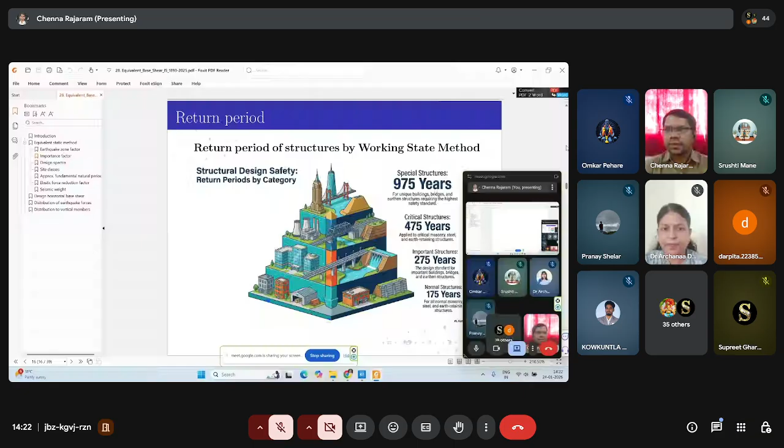So is my screen visible? Yes sir. Thank you Dr. Archana ji and Vidyavan College of Engineering and Technology, Mumbai. So today, without any delay, I'm going to give the lecture on determination of seismic base shear by equivalent static method as per IS 1893:2025.

The contents of today's presentation are: introduction, equivalent static method, earthquake zone factors, importance factor, design spectra, site classes, approximate fundamental natural period, elastic force reduction factors, and seismic weight calculations for calculating design base shear using the equivalent static method. Also design horizontal base shear, how it gets distributed onto the floors, and how to calculate design base shear in the vertical direction and its distribution into the vertical members. These are the contents to be delivered in today's presentation.

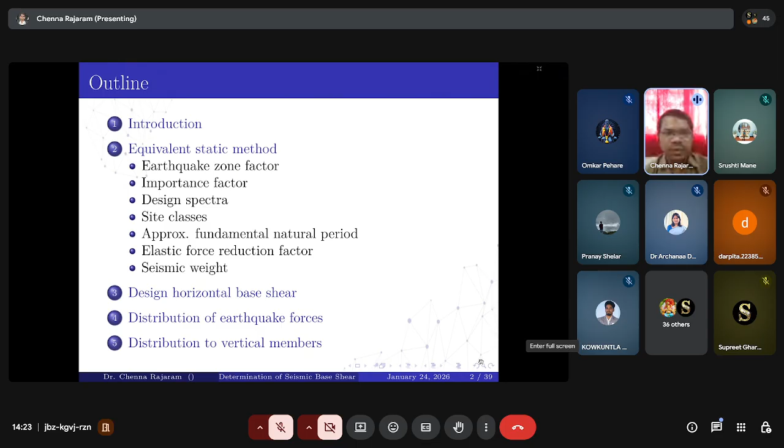Coming to the introduction, before discussing the equivalent static method, we should first discuss the earthquake design philosophy of IS 1893. As per IS 1893, the design philosophy is that for minor shaking, the main members should not get damaged, like beam elements and column elements.

The building parts that do not carry load may sustain repairable damage. For moderate shaking, the main members may sustain repairable damage, and under strong shaking, main members may sustain severe damage but should not collapse. So the main objective and motto of the design philosophy of IS 1893 is that the building should not collapse, even though severe cracks or severe damage may take place.

It is a fundamental safety concept. Safety is very important in earthquake design philosophy, which governs how a structure is expected to behave under loads.

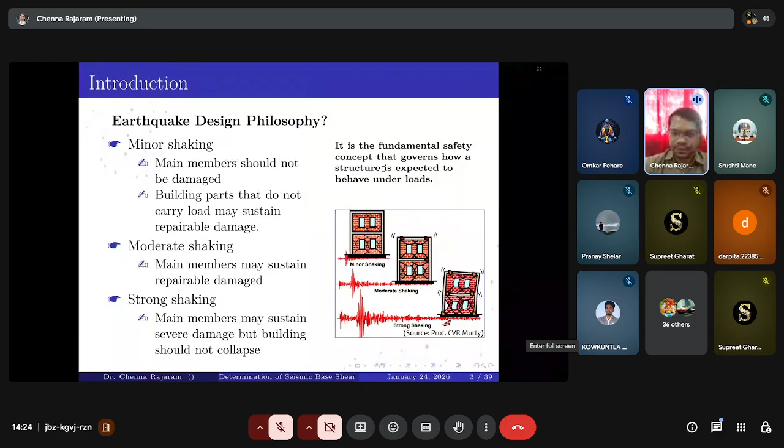Generally there is a contradiction between earthquake resistant and earthquake proof. What is the difference between these two? When we talk about earthquake resistant, the main objective is life safety. It prevents catastrophic collapse and allows people to evacuate safely. This is what earthquake resistant design is.

Earthquake proof means the main objective or goal is zero damage, which is not possible. During any kind of shaking, whether minor, moderate, or severe, there should be some kind of damage that takes place in the building itself. That's why zero damage is not possible in a building during the shaking of the ground.

So this is earthquake proof design, not earthquake resistant design, and it aims to withstand any earthquake without any structural harm. The design philosophy is 'it bends, don't break.' In earthquake proof, the main philosophy is it eliminates all seismic effects.

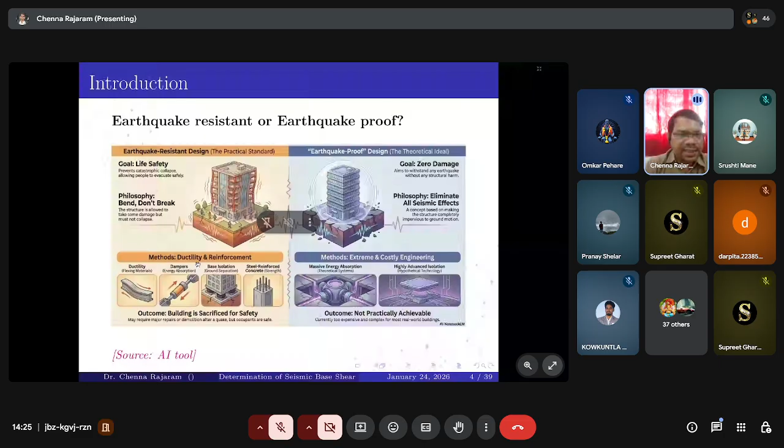What are the methods for earthquake resistant design so that damage can be reduced? The methods are: provide ductility in the structure in terms of reinforcement as per IS 13920; dampers, even various types like passive dampers, active dampers, liquid dampers - these absorb energy; base isolation, which is also one of the techniques to reduce structural damage; and steel reinforcement concrete, which provides the strength of the structure.

Coming to earthquake proof, it is very difficult providing massive energy absorption. As you know, a huge amount of energy comes during earthquakes, so absorbing that kind of energy is very difficult. Providing this massive energy absorption is highly difficult, along with highly advanced isolation. So structures which are constructed should be earthquake resistant structures, not earthquake proof structures.

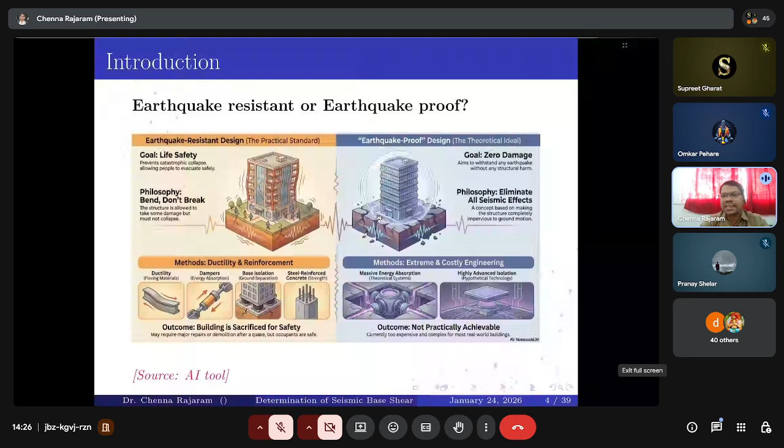What are the various methods in earthquake analysis? The method of analysis shall be linear for the earthquake resistant design of structures, which can be performed by the following methods. The first one is static analysis by the equivalent static method. Basically there are two types of methods: one is static analysis, the other is dynamic analysis. For static analysis, the method we follow is the equivalent static method.

There are two methods: one is the response spectrum method, the other is the response history method. Previously, this response history method was termed the time history method. The response history method is basically a dynamic analysis method.

Now the next question is, when do we go for the linear equivalent static method? And what is the linear equivalent static method? It is a method of linear analysis of a structure to estimate the dynamic earthquake response, considering the fundamental lateral mode of oscillation, using the pseudospectral acceleration response spectrum of the design earthquake hazard.

Now, what are the terminologies in the definition of the linear equivalent static method? We'll discuss them one by one.

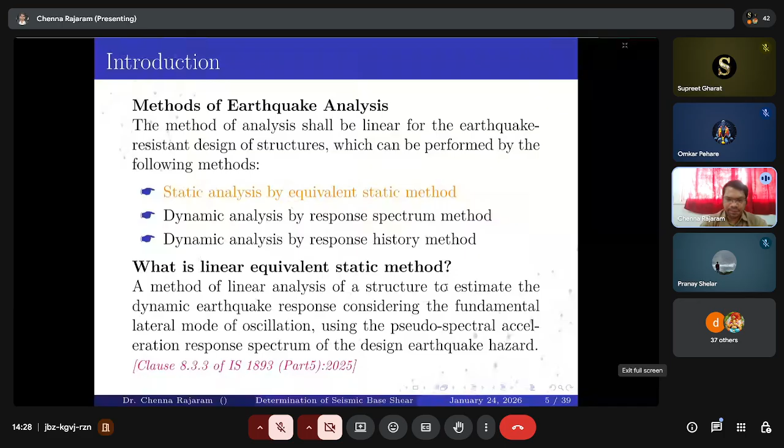Now, when do we apply this equivalent static method? As per IS 1893-2025, it is generally applicable when there is more than 80% of the mode participation in the translatory direction for the fundamental natural period. Only then is this equivalent static method applicable; if not, then we will not go for the equivalent static method.

In the previous code, that is IS 1893-2016, there are guidelines based on the height of the building and based on the zone. It is classified that we have to go for equivalent static analysis under these kinds of considerations.

Consideration is completely different. Coming to the earthquake zones, we'll discuss the earthquake zone part and building categories and building configurations. Building categories basically divide into special structures, normal structures, and important structures. We'll discuss each one of them.

For building configurations, whether the structure is regular or irregular, we have to go with the equivalent static method as per the current code, and the response spectrum method, which is a dynamic analysis. Irrespective of the zone or building category, we have to perform the response spectrum method. It is recommended for irregular buildings.

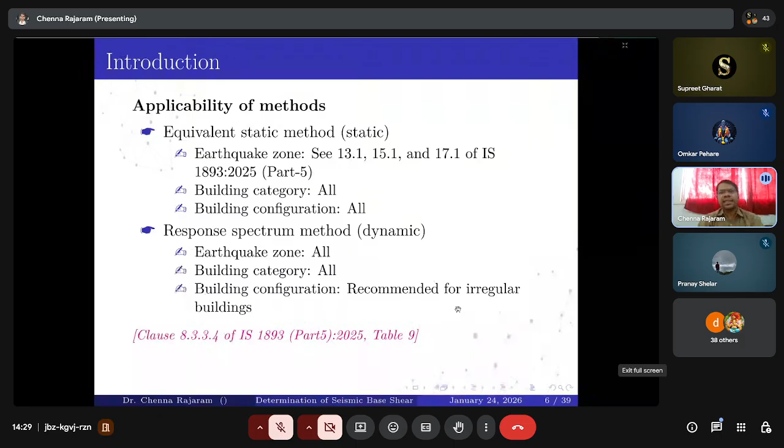There is another method called the response history method, which is a time history method. It is applicable for all zones and building categories, recommended for critical and special buildings, except for critical and special small buildings. Now what is the definition of a small building? The definition is given here.

For a single story structure, if the built up area is less than 50 square meters, with load bearing walls oriented along both principal plane directions to minimize torsional irregularity, structural plan density not less than 15%, and laterally supported wall lengths not more than 3 meters, it is termed a small building according to the latest IS 1893 code. Building configurations are recommended for all irregular buildings.

In the earlier version of IS 1893, we used maybe one or two ground motions to obtain the response of the structure, without knowing the characteristics of the ground motion itself. Now, as per the response history method in the latest code, we have to perform 30 ground motions. We cannot perform only 29 or 28 ground motions, there is no relaxation in that. Those doing the response history method have to perform 30 ground motion records itself.

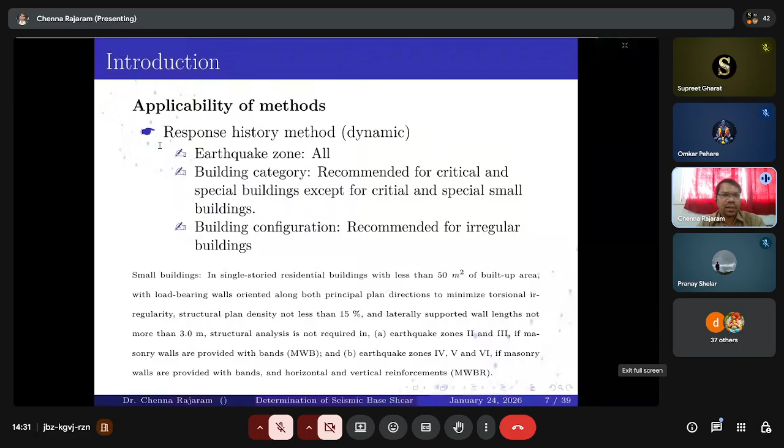What is the equivalent static method procedure? What are the various steps involved? A pictorial representation is given for the equivalent static method. The first step is: when do we use this method? It is clearly given for structures where the first translational mode of oscillation governs the primary earthquake response. The governing parameter is the mode shape, that is, 80% of the mass participation is in the first mode. Then we go for the equivalent static method.

The second step is to prepare the analytical model, using any kind of software, and apply gravity loads such as dead loads, live loads, and other loads onto the structure. Then perform and apply the earthquake load, that is, the lateral load.

Then comes the combination of loads. As per IS 1893, the load combinations are given, like 1.2 times dead load plus 1.2 times live load plus earthquake load in x direction, y direction, and so on. There are various cases given in IS 1893, and we have to perform all the load cases on the structure. Then extract the structural response after applying the load combinations, and then we go for the design of the structure.

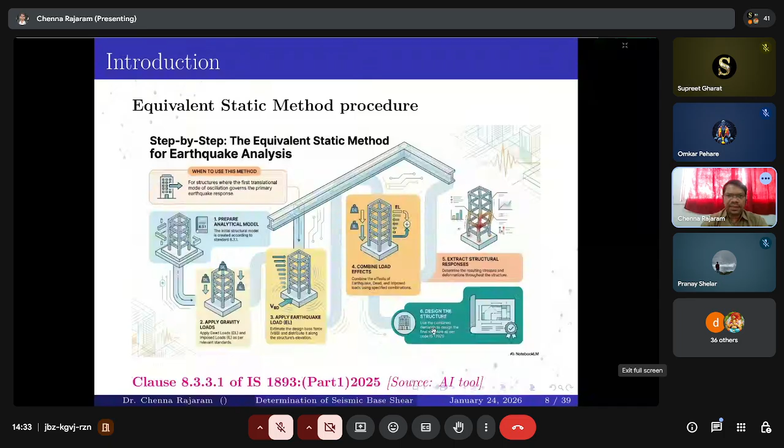The next topic is the revision of the codes. The Indian Standard IS 1893 was initially published in 1962, titled 'Recommendations for Earthquake Resistant Design of Structures.' The first revision took place in 1966, followed by 1970, 1975, 1984, then 2002, 2016, and 2025. From 1984 onward, there is a large gap between revisions, from the fourth to the fifth, sixth, and seventh revisions.

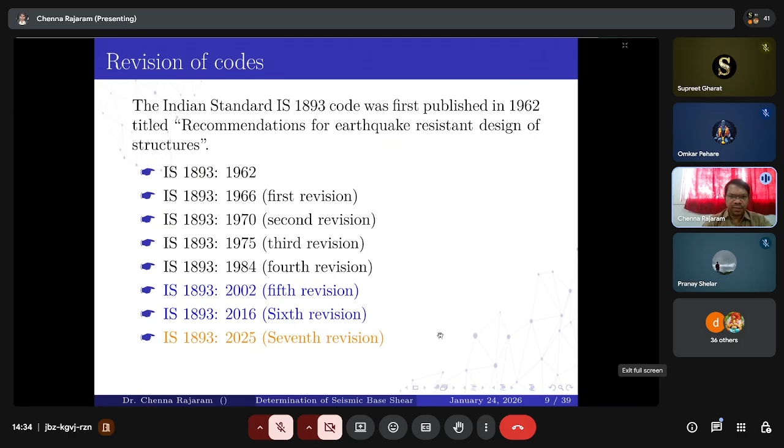We'll see the various categories in IS 1893 2016 and 2025. In 2016 there are five parts. Part 1 relates to general provisions of the building and hazard, part 2 relates to liquid retaining structures like liquid storage tanks, part 3 is for bridges and retaining walls, part 4 is for industrial structures, and part 5 is for base isolation buildings.

In 2025, more parts are coming covering various kinds of structures. Part 1 is general provisions similar to 2016, part 2 is for liquid retaining structures, part 3 is for bridges, part 4 for industrial structures, part 5 for buildings, part 6 for base isolation, part 7 for long distance pipelines, part 8 for steel towers, part 9 for coastal structures, part 10 for tunnels, and part 11 for earthen embankments. Out of these 11 parts, a few are already released, and a few more are under review.

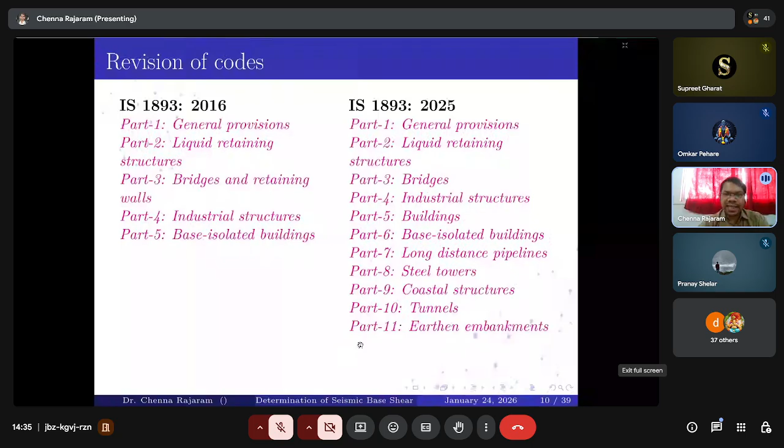Now, what is the equation used for calculating the equivalent static method? There is an earthquake horizontal force, VBDH, at the base of the structure, and an earthquake vertical force, VBDV, at the base of the structure, considering the pseudo-spectral acceleration spectrum shall be estimated as follows. This is the equation.

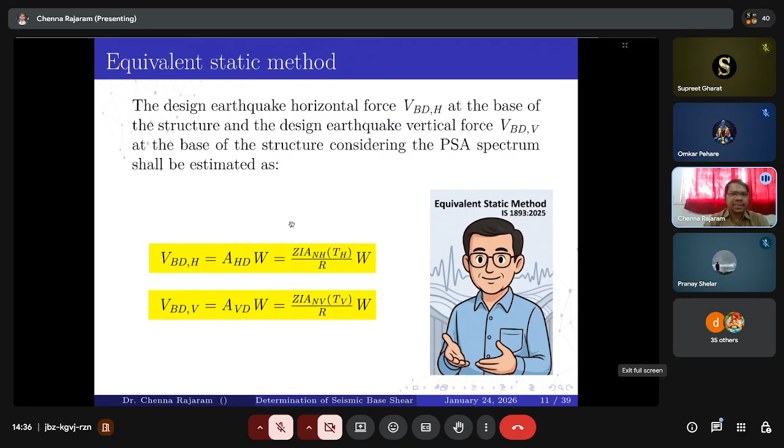In the 2016 code, we use the equation Z by 2, I by R, and SA by G for calculating the AH value, that is the horizontal seismic coefficient. But here there is no term called 2—why, we will discuss in subsequent slides. So VBDH equals AHD into W, where W is the seismic weight and AHD is the horizontal design seismic coefficient. Similarly for the vertical direction.

Now coming to the earthquake zone factor: the value of peak ground acceleration divided by acceleration due to gravity, SA by G, is considered for estimating the effects of design earthquake shaking on the structure, corresponding to the return period and the earthquake zone in which the structure is located. In the previous code, there were only four zone factors, for zone 2, zone 3, zone 4, and zone 5.

The factors are 0.1, 0.16, 0.24, and 0.36. So the maximum peak ground acceleration for zone 5 is 0.36.

But here, the return period—a very important parameter—came in IS 1893 of 2025. These return periods are given as 75 up to 9,975. How we calculate these return periods, I will give an example in the subsequent slides.

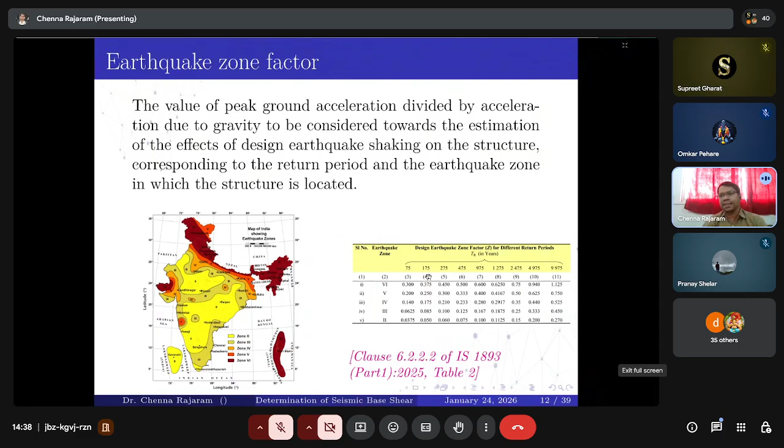The buildings are categorized differently in the earlier code—not based on functional utility, but given as an importance factor. For normal buildings, the importance factor is 1; for hospitals and similar structures it is 1.2; and for special structures it is 1.5. But here, the buildings themselves are classified. I'll show how it is classified.

We'll see what is the return period, with a simple calculation given here. So what is return period? The return period or recurrence interval of an earthquake is the estimated average time between events of a specific intensity or magnitude occurring at a given location.

So what is the return period of an earthquake that has a 2% probability of exceeding in 50 years, assuming the design life of the structure is 50 years? We use the equation Pn equals 1 minus (1 minus 1 by t) whole to the power of n, where n is the design life of the building, that is 50 years, and the probability is 0.02.

By simplifying this equation to solve for t, it is approximately equal to 2475 years.

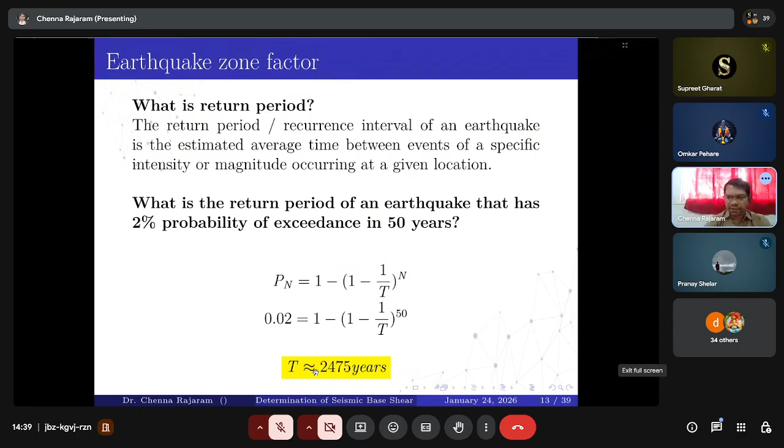So coming to the return periods, based on the return periods, these return periods are assigned to the structures. Earlier the concept of return period was not there, but whatever spectrum we see in the earlier code, that is for 2,475 years return period, for 2% probability of the structure. Now here the return periods are assigned to the structure.

So normal structures, important structures, critical structures, and special structures - these are the categories given in the current code. Normal structure means all normal masonry, steel, and earth retaining structures. Important structures means the design standards for important buildings, bridges, and earthen structures. Critical structures means applied to critical masonry, steel, and earth retaining structures. Special structures means bridges and earthen structures requiring the highest safety standards.

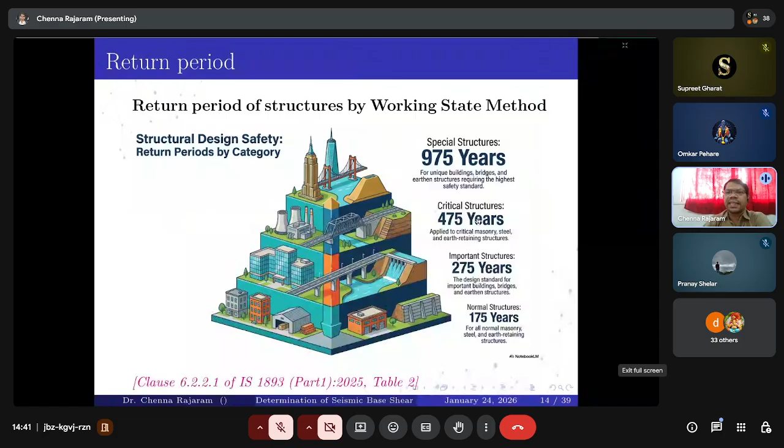There is a tabular column given in 1893 showing what types of buildings come under each category of structure, from normal to special structures.

This is for working stress method. There is one more concept called working stress method and limit state method, which is based on performance based design. The current version of the 1893 code is based on performance based design, that's why these two methods are provided. In the draft code, if you observe 1893, there are two terms called strength criteria and serviceability criteria, similarly here the terms are replaced with performance based design.

If you see the limit state method, for normal structure the return period is 475 years, whereas in working stress method the return period is 175 years for normal structures. Similarly for special structures, the return period is 4,975 years, but for working stress method the return period for special structure is...

Sorry to interrupt, we are not able to see your slides. Unable to see, huh? It was there just 1 minute before, it got cut. Is it okay now? No, we are still not able to see. I think screen sharing stopped. Screen share, 1 second. Yeah, now is it visible? Yes, sir, yes it's visible right now. Yes, fine, thank you.

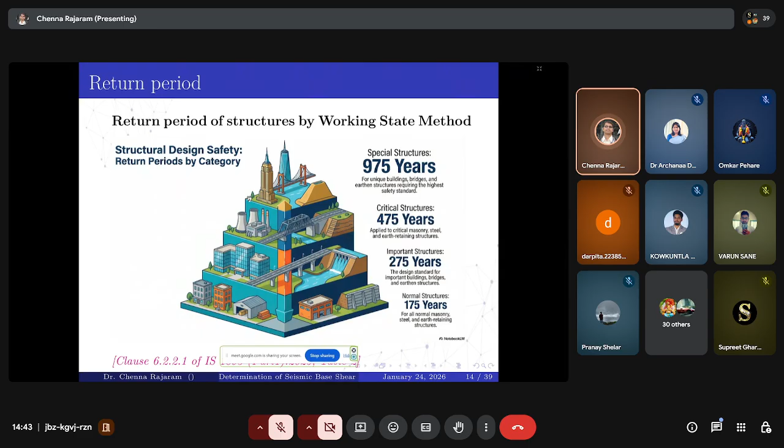So now if you observe the return period for limit state design, the maximum return period is 4,975 for special structures, and 975 years for special structures in working stress method.

Then the next parameter is the importance factor. The importance factor used in the estimation of the design acceleration coefficient of a structure shall be taken as specified in the respective part of IS 1893 depending on the type of structure. The categories are normal structure, important structure, critical structure and special structure as per clause 8.2 of IS 1893 part 5. Irrespective of the type of structure, the importance factor is 1, meaning we are not really considering it in the current version since multiplying by 1 gives the same value. But in the earlier version of the code, the importance factors were given like 1, 1.2 and 1.5.

Next, the important parameter is the design spectrum. Earlier the design spectrum was different, and here it is completely different - site class A and B, site class C, site class D. The site classes are categorized based on the shear wave velocity, that is the VS30 value, and depending on VS30 values the site classes are classified. If VS30 is less than 180 meters per second, the site class is E; between 180 to 360, it is site class D; 360 to 760 is site class C; 760 to 1500 is classified as B; and more than 1500 is classified as A.

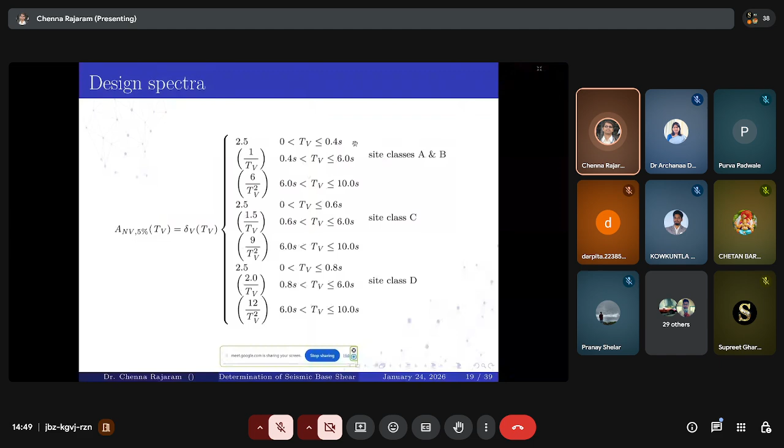Next, how do we calculate the horizontal and vertical pseudospectral velocity and spectral displacements? For that, the equation is given - whatever value you calculated, to obtain the velocity component, you have to multiply with Th by 2 pi. And if you want to calculate the displacement value, you have to multiply with Th by 2 pi whole square. These are the equations given in 1893.

So the equations discussed so far related to the design spectra are if the structure is above the ground. Now, what happens if the structure is below the ground? In metro areas like Mumbai, Chennai, or Hyderabad, some part of the structure is below the ground and some part is above the ground. So if that is the case, how do you consider the structure below the ground?

For the structure or portions of the structure buried below ground by the drilled-in-place construction method, the normalized horizontal and vertical below ground values shall be estimated using these equations. If the height of the structure HE is in between 0 to 30 meters, then for horizontal coefficient value, we use this equation. If it is more than 30 meters, simply multiply with 0.5 with the calculated ANH earlier - that means 50% you have to consider as below the ground.

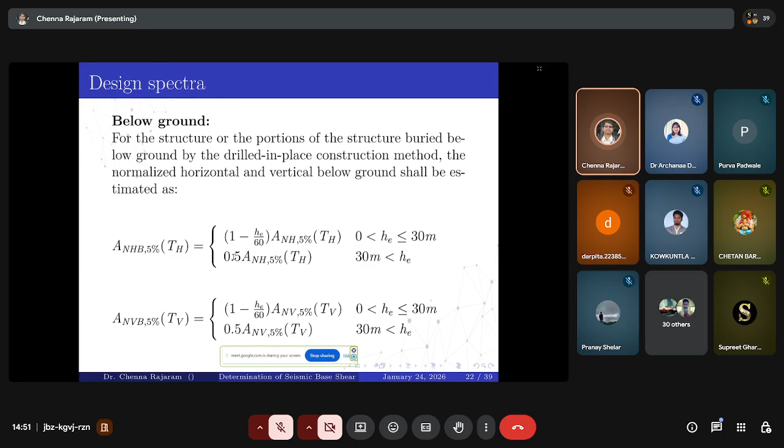Here you see the spectrum for site class A, B, C and D, but what about site class E? It is categorized from site class A to site class E, but the spectrum is not given for site class E. For that kind of case, we have to go with the site specific hazard analysis, wherever we are going to generate the spectrum for that particular site.

For example, for Mumbai region, consider site class E where the VS30 value is less than 180 meters per second. If that is the case, for that particular location, one has to generate the ground motions, and based on those ground motions, generate the spectrum, and that spectrum we have to use in the analysis.

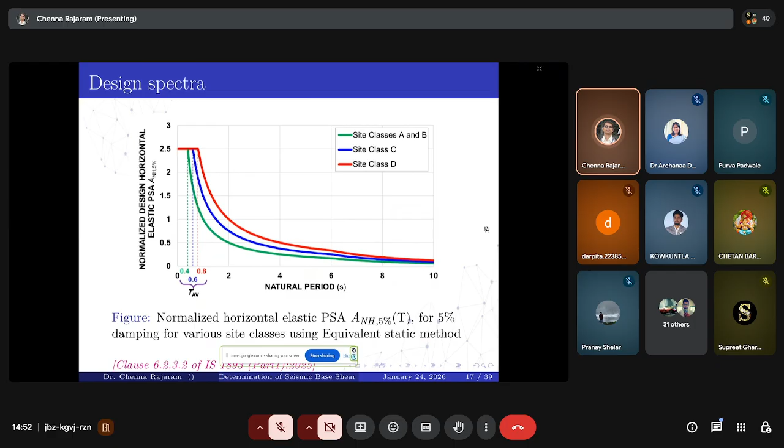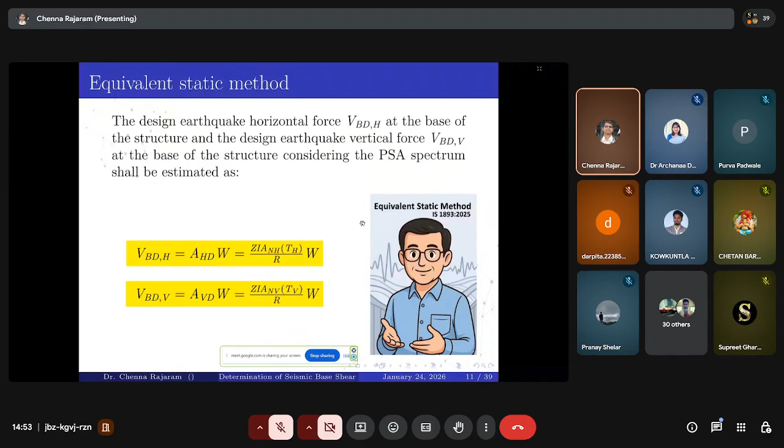And there, the z component is not there in the equation. If you observe the equation which I have given here, there is a z term for calculating the design base shear in horizontal and vertical direction. But for site class E, there is no z component, because one has to generate the ground motion and the spectrum itself. So there is no z component, it is already embedded in the spectrum itself. That's why the z component should not be there for both horizontal and vertical directions.

Then the next one is the normalized horizontal and vertical below ground, which is similar to the earlier case.

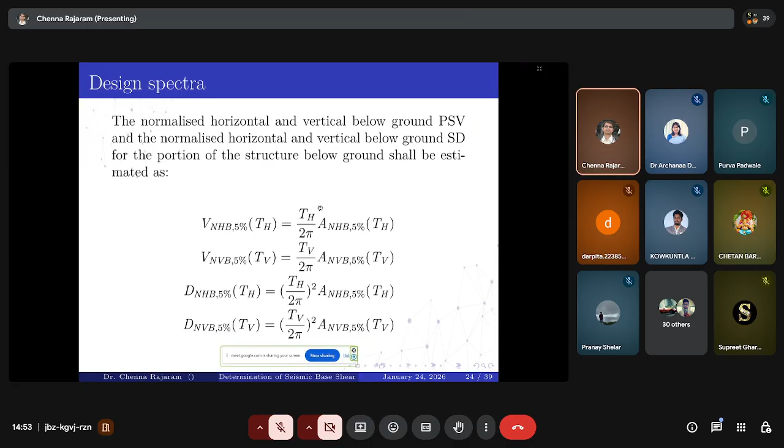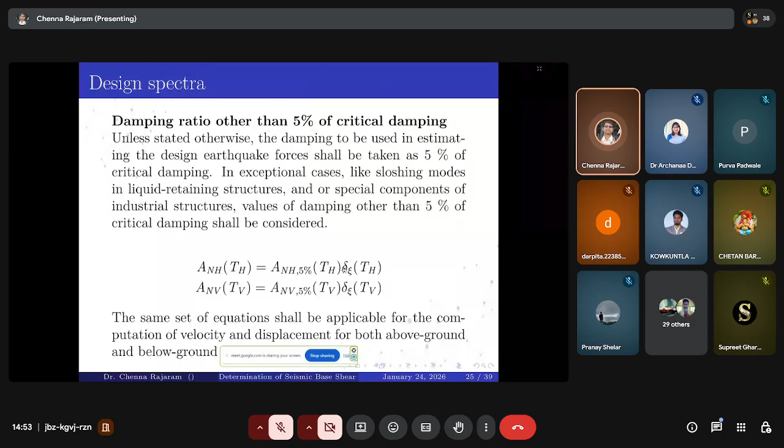Next, if the damping ratio is other than 5% of the critical damping -- so far we discussed the case if the damping ratio is 5%. Now, you have to multiply with a factor, that is delta zeta, for both horizontal and vertical directions. So what is the delta zeta value? The equations are given here.

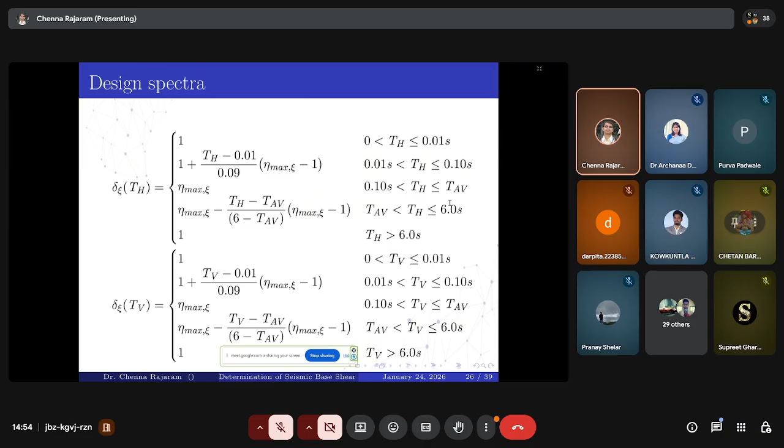The horizontal fundamental period is categorized as in between 0 to 0.01 second, 0.01 to 0.1, more than 0.1, and in between TAV to 6 seconds. Now what is this TAV for all these cases? If you observe the design spectrum, the values given are 0.4, 0.6 and 0.8. This is the corner period of the structure.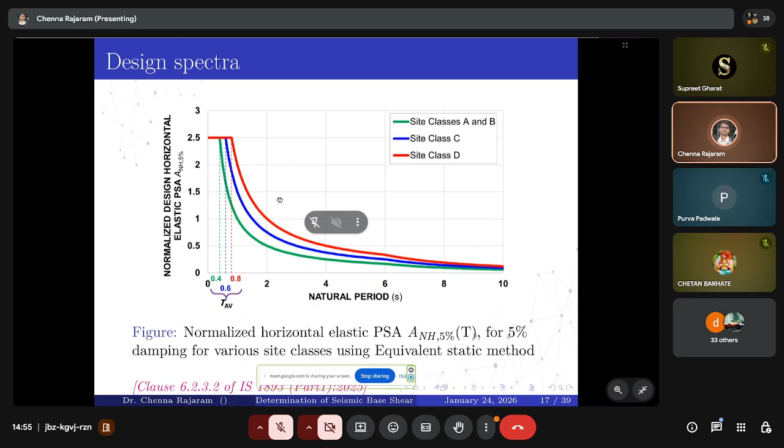If you observe the design spectrum, initially at 2.5 it is constant with respect to the time period. So up to 0 to 0.4 seconds, it is constant for site class A and B, and after that reduction takes place with respect to the natural period. That is your TAV for site class A and B. For site class C, the TAV value is 0.6. For site class D, the TAV is 0.8 seconds.

So if your time period is in between 0.4 to 0.6, then we have to use this equation. Like that it is categorized, so that is what the corner period is, as I discussed, and in that there is a term called eta max zeta.

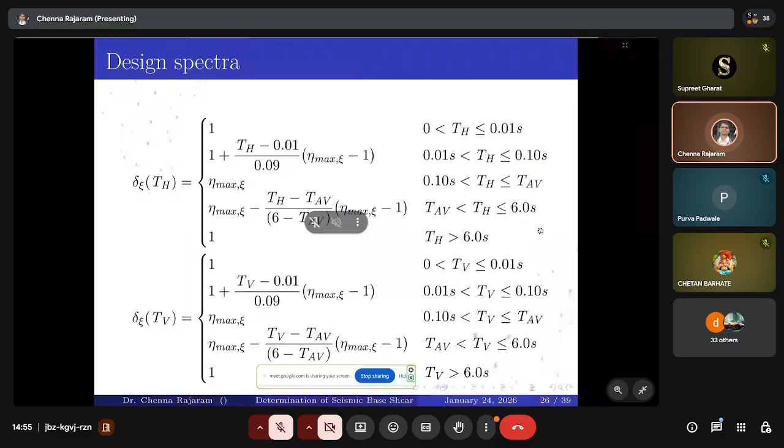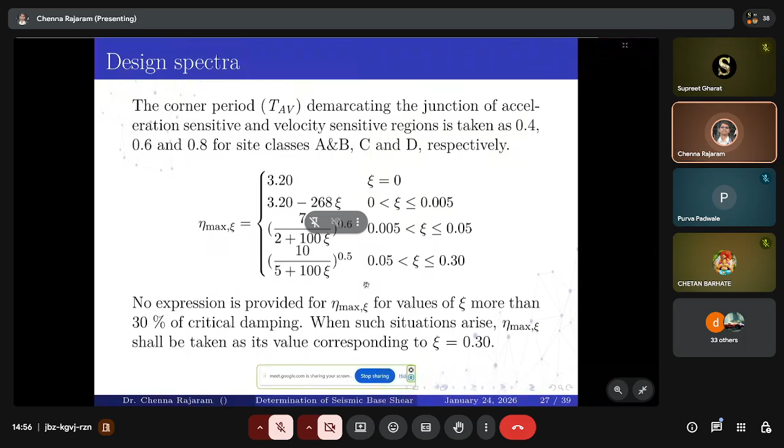The eta max zeta value is given: if the zeta value is 0, we use 3.2 as the eta max zeta value. If it is in between 0 to 0.5%, and 0.5% to 5%, we use this equation, and 5% to 30%, we use this equation. There is no guideline or clause if the structure has more than 30% damping ratio -- no expression is given in the code for eta max zeta for values of zeta more than 30% of critical damping. In such a situation, whatever value is obtained for the 30% value of eta max zeta, we use the same equation if the zeta value is more than 30%.

This is the site classification, how to calculate the site classes based on the shear wave velocity. Here is how the soil profile structure looks like. For different layers, different colors are given -- let us say the first is layer 1, layer 2, layer 3, and layer 4.

Beside that, the diagram shows the distribution of shear wave velocity along the depth of the site. From 0 to 100 meters depth, the shear wave velocity values are given, the profile is like this. Based on that, we have to calculate the VS30 value. If it is only one layer, we can directly extract that value.

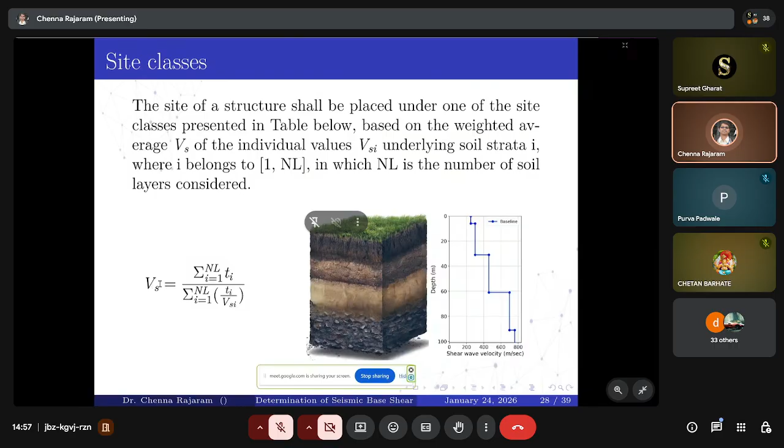So this is the classification that I already discussed for estimating the site classes. And the next is the shear velocity of each layer at the site for normal structures in all earthquake zones. Important structures in earthquake zones 2 and 3 may be estimated using the following approximate correlations, so there are equations given.

Suppose for a given site I don't have any shear wave velocity value in that particular area, but I know the n value, that is the SPT value. So depending on the type of soil, that is the fineness content, here the equations are given. Based on these equations, I can easily estimate the shear wave velocity value.

Correlations are given based on VS30 and shear wave velocity value. This kind of relation is there even in some PhD theses. For example, for the Delhi region, Professor Neelima has used the shear wave velocity for different regions in Delhi based on the SPT values only. So like that, we can extract or compute the shear wave velocity based on the SPT values.

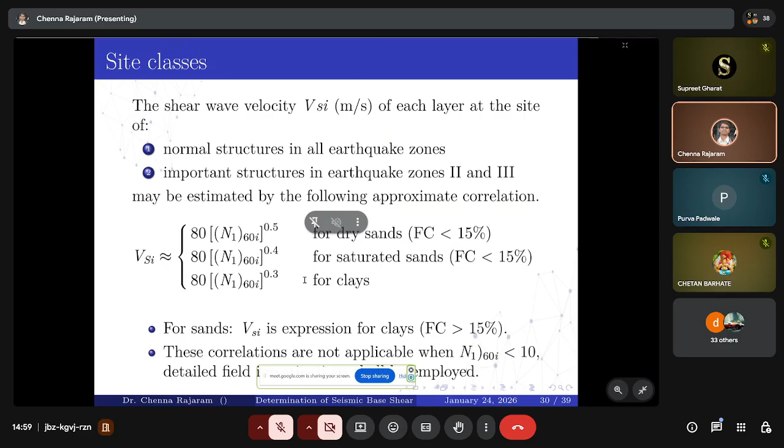Coming to the approximate fundamental natural period, the approximate fundamental translational natural period Ta of oscillation less than 50 meters - this is very very important. If the height of the structure is less than 50 meters, we use the equivalent static method. If the height is more than 50 meters, the fundamental period is to be calculated using IS 16700, which is based on high-rise buildings.

So if it is less than 50 meters, we use the IS 1893 code. For bare frame, where you have no infills, the fundamental natural period TA is equal to 0.075 h to the power of 0.75 for RC structures, and 0.085 h to the power of 0.75 for steel.

So for bare frame, there is no change between the previous code and the current code. But for RC buildings, the equation has both numerator and denominator. For the numerator, you already know this equation, 0.075 h to the power of 0.75. But the denominator involves various parameters like density value or floor area ratio. So you have to calculate each of the parameters to obtain the fundamental period value. For all other structures, the equation for fundamental natural period is 0.09 h divided by root d.

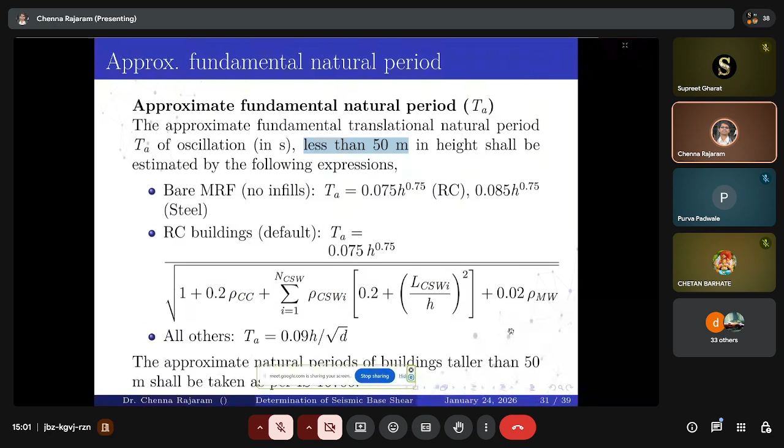Next, elastic force reduction factor, that is R. The R value is given for various kinds of structures similar to the earlier code. So there's a schematic diagram which represents the R value for various types of structures.

For frame-based systems, that is steel and RC - for special moment resisting frames, the R value is given as 5. For steel braced frames, the value of R is given between 3 to 5, and for ordinary moment resisting frames it is given as 3. For wall based systems it is given as 5, special RC structural walls R is 5, and for unreinforced masonry, R is 1.5 to 2.5.

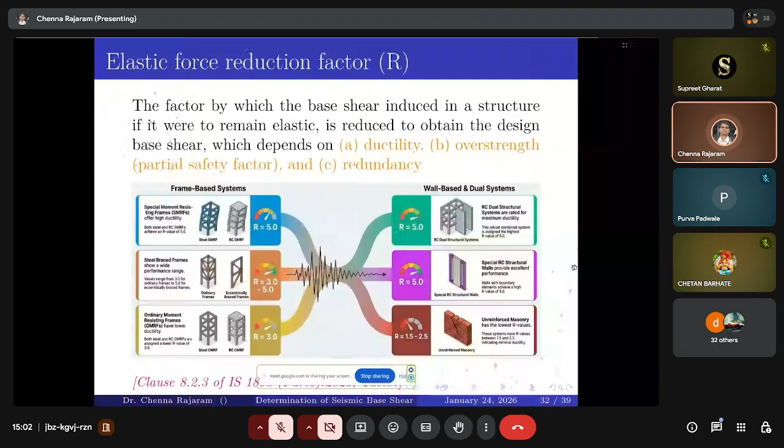Then for the elastic force reduction factor, three things are very very important: ductility, overstrength, and redundancy. Ductility is the ability of the structure to undergo large deformation without significant loss in strength. Overstrength means higher strength than assumed in design, providing a safety margin against collapse - this is somehow related to the factor of safety. Redundancy is the multiple load paths reducing the impact of local failures.

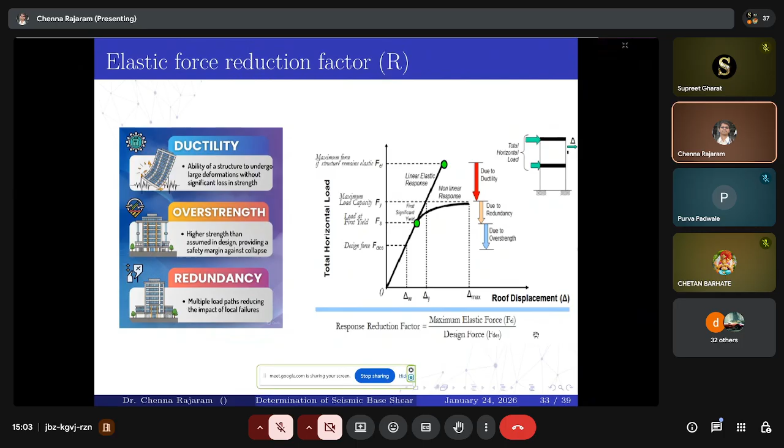Then the seismic weight calculation: how do we calculate the seismic weight? The seismic weight of the structure is the sum of the seismic weight of all floors. For each floor, it is the sum of the dead loads and the floor-appropriate contributions of the weights of columns, walls, and any other loads on the floor. We consider all floors from each story, taking half the story below and half the story above as the seismic weight of that floor. Summation of all these seismic weights gives the seismic weight of the structure.

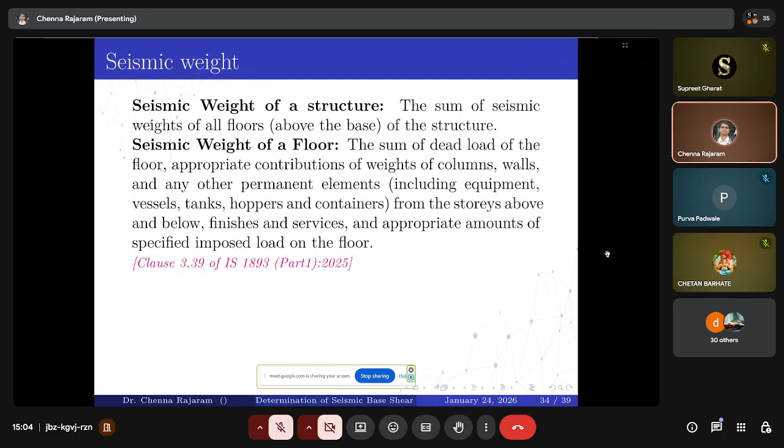Then we use the same equation, with limits defined for the design horizontal base shear for buildings of height less than 50 meters. The design horizontal earthquake base shear, VBDH, for design shall not be taken less than a minimum value. Whatever base shear we calculate, whether correct or not, this minimum ensures the value is valid per code: 0.625 Zi by R into W, which is greater than or equal to 0.015 W.

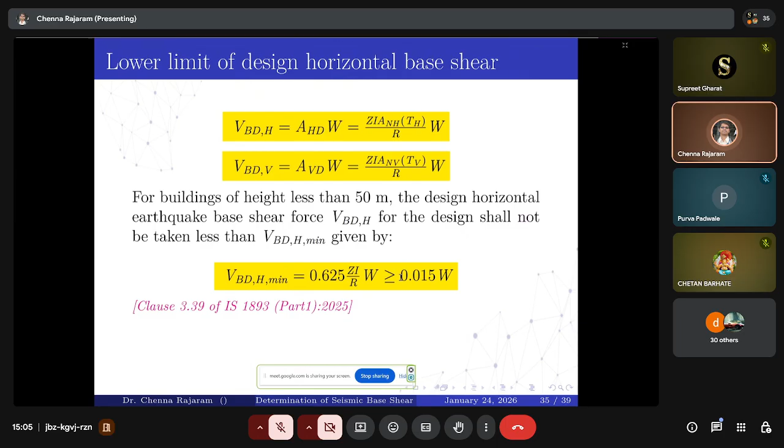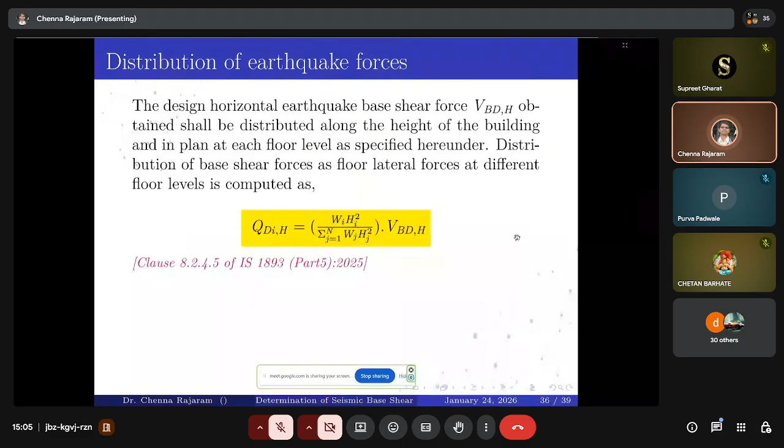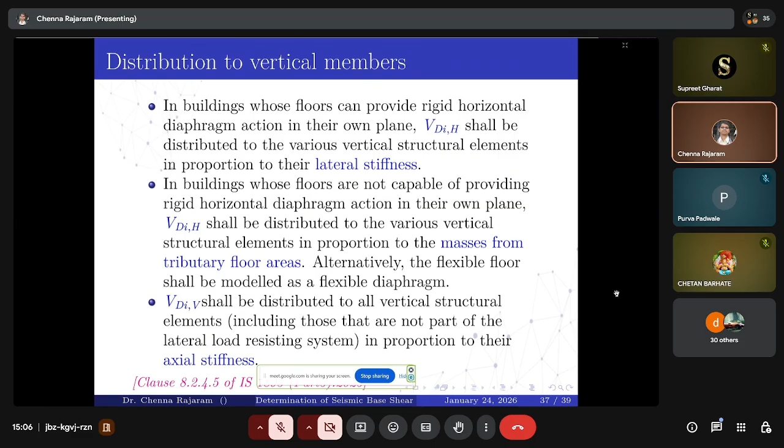After obtaining the base shear value, it is to be distributed to each floor. The same equation is used for both IS 1893:2016 and 2025. These forces are then distributed to the vertical members. In the horizontal direction, if floors have rigid diaphragm action, distribution is based on lateral stiffness; if not rigid, distribution is based on masses from tributary areas. In the vertical direction, distribution is according to axial stiffness. This is how the base shear is distributed onto each floor.

So this is how we calculate the design base shear and the distribution of forces using the equivalent static method.

This presentation is dedicated to the professionals and researchers contributing to the refinement, interpretation, and implementation of IS 1893-2025 for improved seismic safety of the Indian built environment.

And if you permit me two minutes of time, then I'll show one calculator which was developed by us.

So actually the IS 1893:2025 seismic base shear calculator is a small calculator developed by Vishali Kamlakar. We have both written a paper on the evolution of base shear from IS 1893 since 1966, showing how the base shear evolved from the first revision to the seventh revision of IS 1893. The paper is still under review, and based on those calculations we developed this calculator.

If you see the earthquake zone, the zones defined here are 2, 3, 4, 5, and 6. Earlier, IS 1893 had only four zones: 2, 3, 4, and 5. The sixth zone is introduced in this current version.

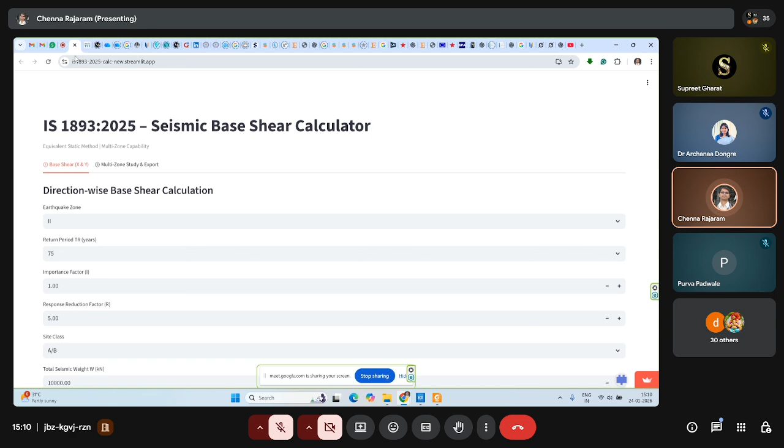Thank you, Professor Rajaram. It was an excellent session with lots of knowledge for us, and our UG, PG students and some professionals are also there. I see that Darpita, are you there? Okay, sorry for the initial glitch from my side. I couldn't hear the voice, and there was some miscommunication. So I see one question in the chat box.

Given all these conditions, I'm reading... someone typed, what about the load combination? That's why I told you, when we're considering equivalent static analysis, we have to consider the load combinations also. But here the load combination is not discussed in my presentation.

One question raised by Ajit: given all the conditions are constant, how much percentage of increase in the base shear force value can be expected for an important structure located in zone 6 for LSM? Let me share my screen.

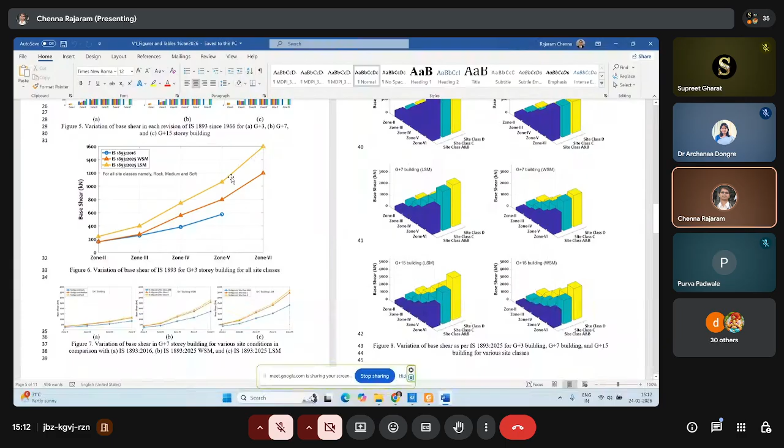Now you see here, base shear. Are you able to see this diagram? So at the end of the presentation, I told you we have written a paper, and in that paper, one of the results is this. For Zone 6, as you asked, for LSM, you see there is a tremendous increase in the base shear. Let me zoom it.

You see, from 800... from 600 for Zone 5 if you consider, because Zone 6 was recently introduced. For Zone 5, from the 2016 revision to LSM, this is the LSM value, so the value is around 1100. Almost double, 1600. So this one is around, say, 1100. So almost 1.8 times to 2 times the base shear value is getting increased.

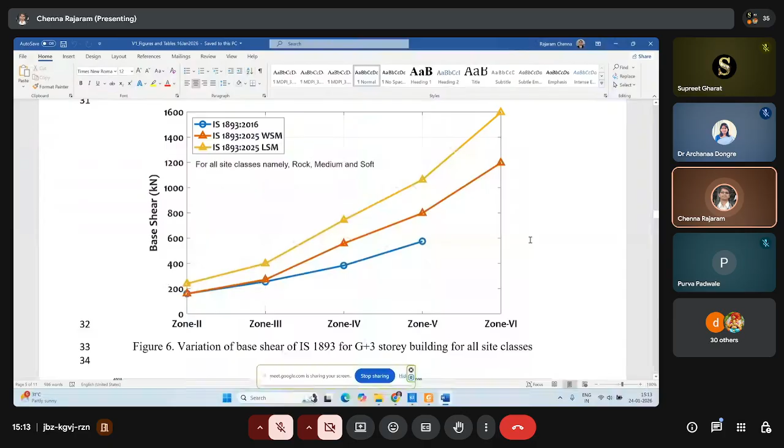This is for a G plus 3 building. Similarly, we considered G plus 6, G plus 9, and G plus 15. These are the cases we considered, and the results are given here. Once we publish this paper, we'll share it in the group so you will get an idea of the evolution of base shear with respect to the zones and revisions.

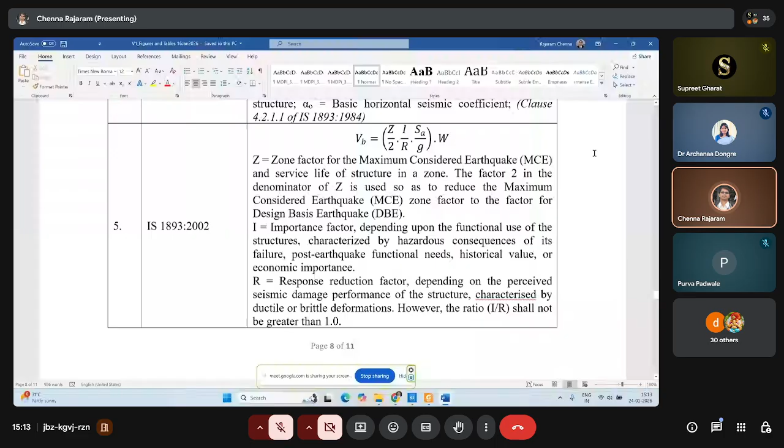Below ground and above ground seismic forces, do we need to add them for the total combined effect? Actually, a video is in the process of being prepared related to this, so you will get an idea of how to calculate the below ground and above ground for the same structure. If some part of the structure is below ground and some part is above ground, then how do we calculate the base shear. We are in the process of preparing that video.